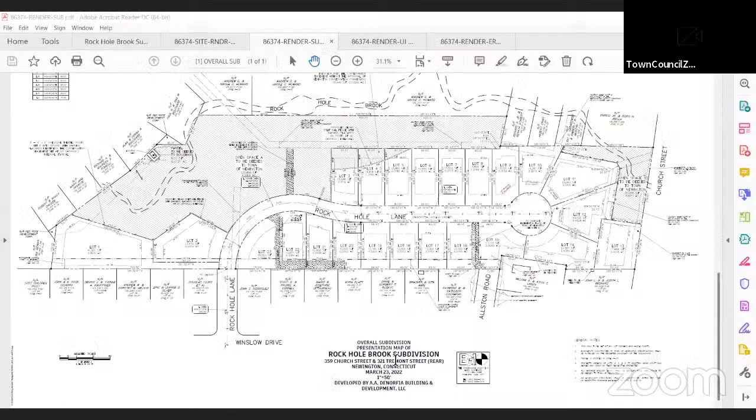I'm going to share the screen, Eric, if that's okay. There you go. Okay, so this application is for a special permit to allow a rear lot or interior lot per section 3.4.9 of our regulations. The proposal is to construct an interior lot on the west side of the proposed Rock Hole Brook subdivision.

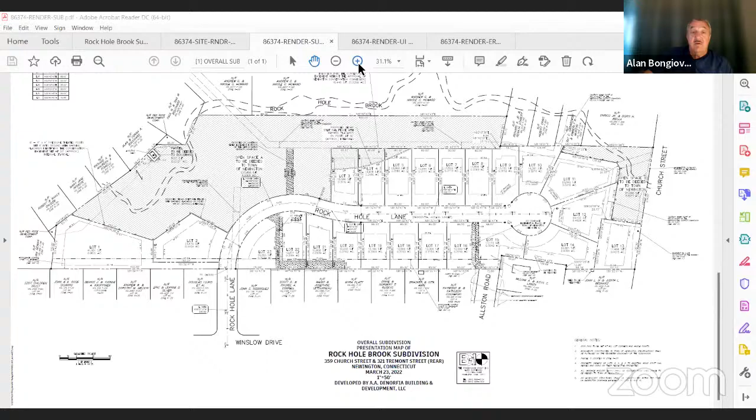I'm going to zoom in on the area. This would be known as lot number 1. In the R12 zone, or the R12 open space, the requirements for an interior lot are that it have at least a 20-foot wide access way owned in fee by the lot, which this does, and that the lot must have a minimum of 1.5 times the minimum required area for the zone.

R12 would be a 12,000 square foot lot. We're required to have a minimum of 18,000. The entire lot with the access way as proposed is almost 42,000 square feet, just under an acre. If you take off the 20-foot access way, we're still over 37,000 square feet. So we well exceed the minimum requirements.

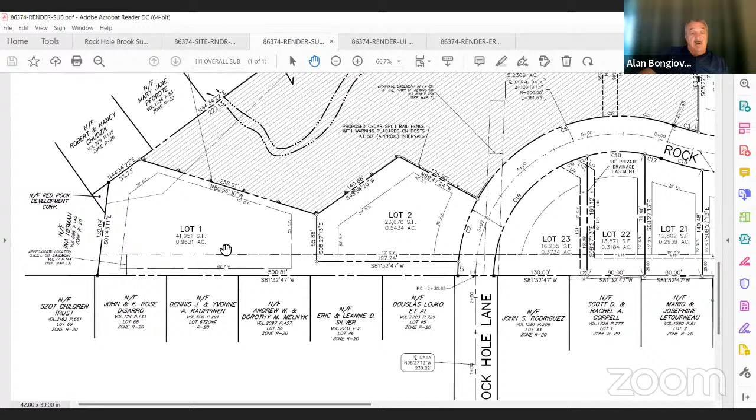Our access way and frontage is on Rock Hole Lane at this location on the west side of Rockhole Lane, and then going about 197 feet to the heart, or the interior, of the lot. At our previous hearing, we did hear from the neighbor, Mr. Melnyk, about screening. He has young children and had a desire to put some fencing in there. We've shown in red here, and it starts at about Rockhole Lane and goes along the rear of lots 102, 108, and 118 Winslow Drive, a proposed fence.

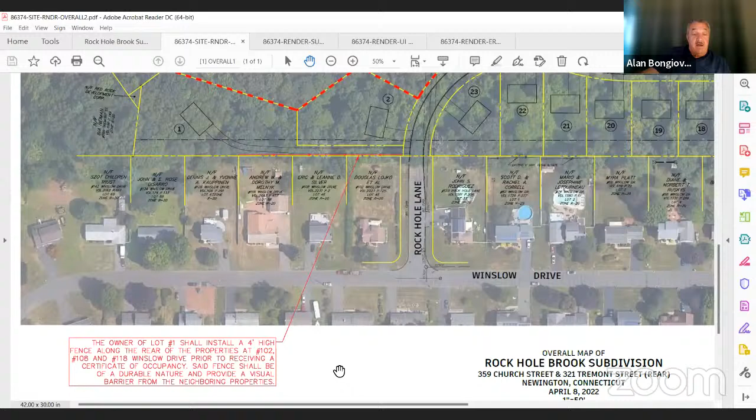I have talked with Mr. Melnyk a couple times since our last meeting. At the last conversation, he requested something in visual screening along the lines of the fence. So we're proposing, and we would be willing to have the commission make this a condition if they choose, that the owner of lot 1, the interior lot, shall install a 4-foot high fence along the rear of the properties at 102, 108, and 118 Winslow Drive prior to receiving a certificate of occupancy. Said fence shall be of a durable nature and provide a visual barrier from the neighboring properties.

As I had conversations with Mr. Melnyk, we didn't really decide on what was a suitable fence or what they would like, but part of the equation is who's going to live on lot number 1 and what they would like. I think this note covers the fact that a fence is required. The lot owner will be required to install that prior to a CO, and I think the language we're proposing will cover that.

There's a myriad of types of fences. There's wood, there's vinyl, there's metal. It could be a combination of a decorative fence with maybe some arborvitaes. So I didn't exactly define what it has to be, but the fact that it has to be a 4-foot high visual barrier fence along that rear, and I believe that should suffice.

This is only along this area because the driveway is close to the property lines. The driveway actually will be at or below the grade of the neighboring properties on Winslow Drive, and it's going to provide some protection for the young children if they were to chase a ball out of their rear yard towards this driveway, so they wouldn't have a conflict with the motor vehicle. And as Mr. Melnyk had requested, some visual screening might be a nice feature. So that's what we have proposed.

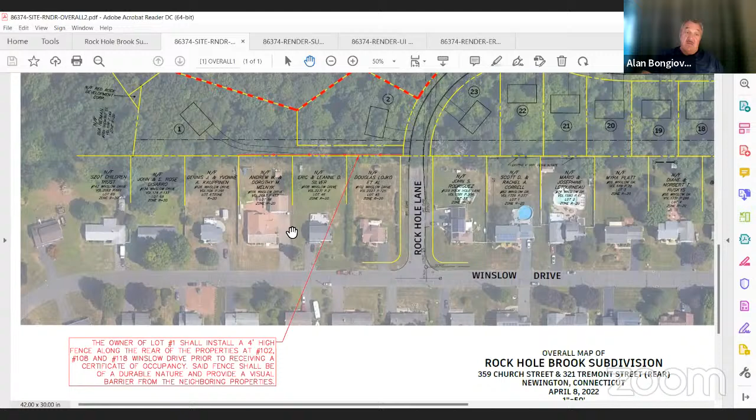The lot is significant in size. It's much bigger, as I said, than the zoning requires. It's a nice wooded area. The entire lot doesn't need to be cleared, but there's enough area to create a nice home site with usable yards and still leave some of the existing trees and buffer area that is on the property.

One of the neighbors had submitted an email to the planner, which was forwarded to me, and that was Mrs. Neiman in this location here to the west of the subdivision. Her house fronts on Tremont Street, and you can see the distance between her house and where a proposed house would go. It's several hundred feet, probably closer to 300 feet.

And between this lot and her property, the Rock Hole Brook traverses through the property, and a good portion of her land is actually on the other side of the brook. On our side of the brook, it's in a natural state, and I believe without permission from the Conservation Commission, it will stay that way in perpetuity.

This lot will be served by MDC sewer and water. All the utility services will be available for the lot. Some of the items to be considered by the commission are that it has a minimum of a 20-foot access way, which this does.

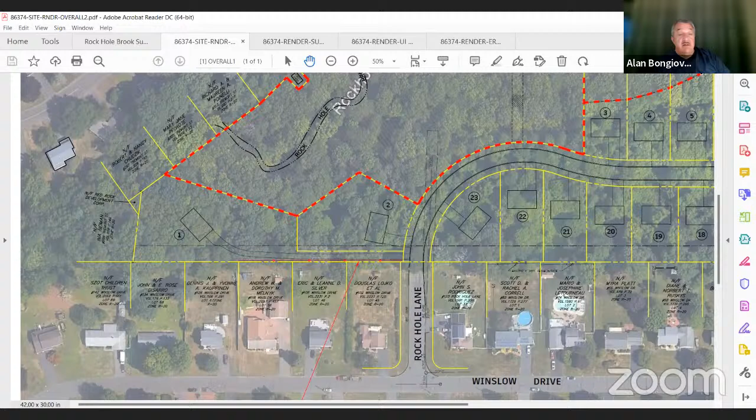And lastly, Ms. Neiman's letter talks about buffering and screening. I still have, I believe, control of the screen. You see the aerial photograph. The lines in yellow are the property lines. To the left of the screen, the most far left is Miss Neiman's house.

From the back of her house to her rear property line is probably in excess of 150 feet. The brook bisects her property. She and her husband acquired additional land so they would have additional buffering in that area, and that was per her statement in the letter. This is all wooded. It is all wetland or regulated area that, if anybody was to do anything, would require permission. We have, and we are proposing, to leave some of the trees on our property.

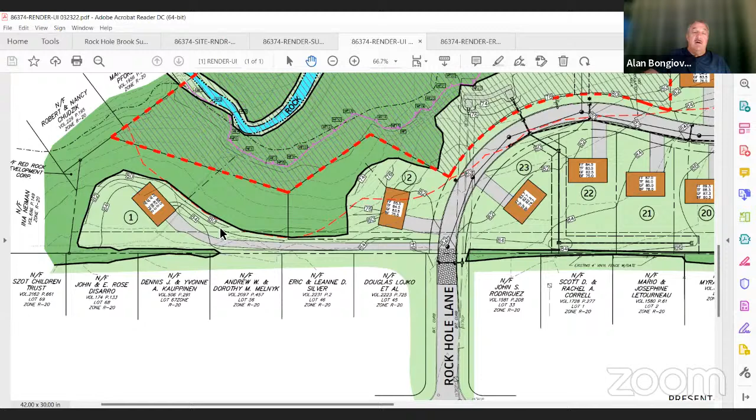There is no requirement for buffering between residential use and residential use. So between any neighbor on Rockhole Lane, or Winslow Drive, or Tremont Street, there's no requirement that one neighbor has to provide screening from another neighbor with the same use. I just submit to the commission that there's adequate screening that exists today and will exist in the future. Any additional screening or buffering is not required and is not part of our regulations.

With that, if you have any more questions, Mr. Chairman, I'd be happy to answer them. Okay, thank you.

Staff, I mean, the public has a position to rebut. Ray, come up here and state your name for the record. And right ahead, this is concerning the rear lot.

All right, there's two questions. Why aren't we getting a road to Church Street? Why do we have to do it this way? And the second one is, where are the rights of the people who aren't here? They've been disconnected. We don't have to say anything. We have you people that we elected. God bless us, we're in trouble, just like America.

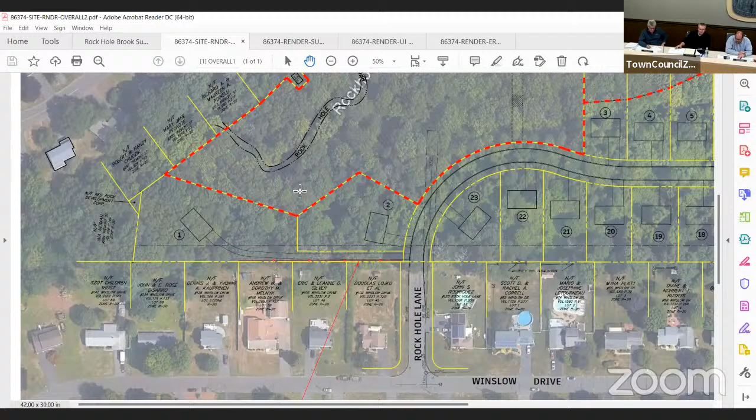Petition 15-22. If Vice Chairman Claffey could read that, please. Petition 15-22, special permit section 3.19.1 and 3.15.6, and associated site plan to allow a place of physical activity, swim school, in the PD zone at 77 and 93 Pane Road. Applicant SBS Realty LLC, owner McBride Properties Inc. Contact Merton J. B. Sabenrad.

I'm going to turn the meeting over to the Vice Chairman. I'm an abutter, and so I'm going to recuse myself from this petition. Thank you. Thank you.

If the applicant is present, I'd like them to come forward and present their petition here before us.

You have to bear with me, this is the first presenting on Zoom in a public space, so I'm going to do my best here. I think, little technical difficulties. Yeah, so I'm live on Zoom on my computer, and screen live share is all good, so you should just be able to... yeah. I think it's going to work.

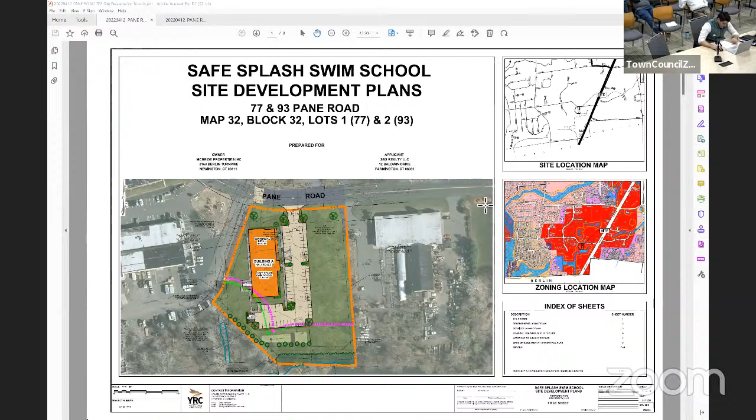All right, so it worked. So the first sheet you have here is your title sheet, sheet 1 in the site plan set. Just real quick to orient everybody on where we are - we're at 77 and 93 Pane Road, which is at the south end of town, at the bottom of the Berlin Turnpike. On this title sheet, Payne Road is up, which would be north. To your right would be S.A. Frink Garden Center, to your left would be Connecticut Auto Repair, to the west. The Stew Leonard's property would be just below off the screen here, to our south. And if you went eastbound on Payne Road, you'd come to the intersection with Berlin Turnpike about 900 to 1,000 feet down the road. What I'm going to do is just jump to the survey that was submitted as part of our site plan application.

It is zoned PD, or Planned Development District, and the current use is vacant. So there's nothing on it now except for an extensive regrowth of invasive species, mainly due to a historical land use back from the earlier mid 1990s when this area was improved.

The S.A. Frank property here was a warehouse by itself. Their property, these two properties, as well as the property to the east, which is storage, and further east, which is the car wash, were all part of a development that improved this area. Speaking directly to our property, the entire area from about the midpoint south was filled to level it off for future development. Nothing's happened since then, but we're here today to come forward with the planned type of development they had at that time.

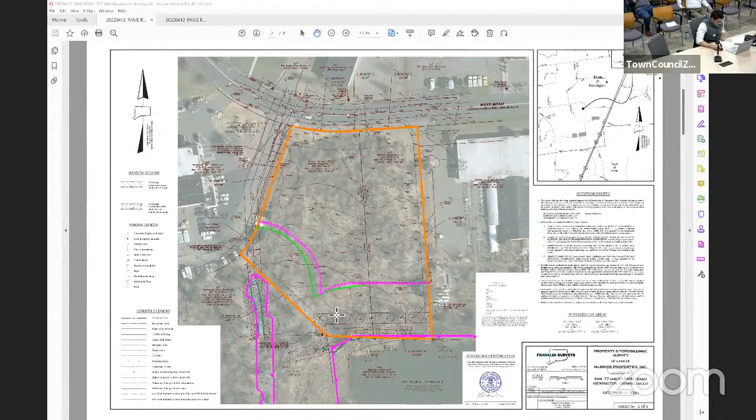Moving forward, this is sheet 2, again with color in the aerial overlaid for clarity. I won't spend too much time on this except for talking about the general access to Payne Road. In the center of the two sites, or the dividing line, which would be combined as part of this property, we have our main access drive to Payne Road on the south side.

That serves a single drive access 24 feet wide through the site and around our building. In orange, you see one building of approximately 11,200 square feet located on the west side of the site. There's no current development proposed on the east side of the site. However, there may be something in the future. There are no plans, but we did leave a spot there for future development.

I am going to speak quickly about access, traffic, and sightlines. We do have adequate sightlines from this proposed driveway location looking in both directions. It's on the outside of this curve, so we have good sightlines looking both west and east towards Berlin Turnpike. A traffic report was performed by VHB. They found that the traffic generated by our site won't significantly impact the traffic on Payne Road or the adjacent intersections. We can go into detail further if there's any questions, but we did study Payne Road and the subject intersections, and there's no significant impact.

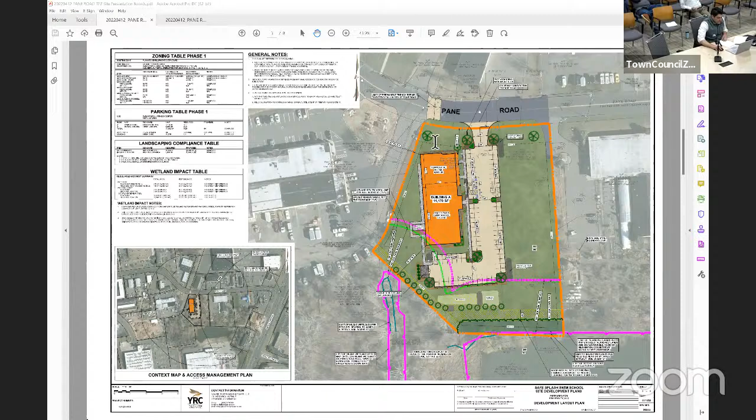This is sheet number 3 from your plan set, a more detailed view of the site layout showing a higher scale resolution of the proposed development layout. As you come onto the site, we have a 28-foot wide access drive that feeds into a 24-foot wide driveway through the development, running north to south and then hooking around the back of the building. We have 64 parking spaces proposed, which exceeds the minimum 56 required for the development. The building itself, on the west side of the site, is 11,170 square feet.

The swim school, which is why we're here tonight, will be located in about 7,000 square feet of the southerly side of the building. The northerly side will be commercial space that's not currently designated, facing Payne Road. Access to the commercial space will be on the east side of the building. Access to the Safe Splash Swim School will also be on the east side, more centrally located in a vestibule. Sidewalks are provided along the entire parking area, connecting all parking spaces as well as the satellite parking area to the south.

On the rear of the site, we have a pedestrian sidewalk that connects all the rear doors, or back of the house doors, with the trash enclosure area, located to the southwest, and to the loading area, located adjacent to the trash enclosure. So I covered parking, covered the trash enclosure. Any questions on the layout before I jump to the next?

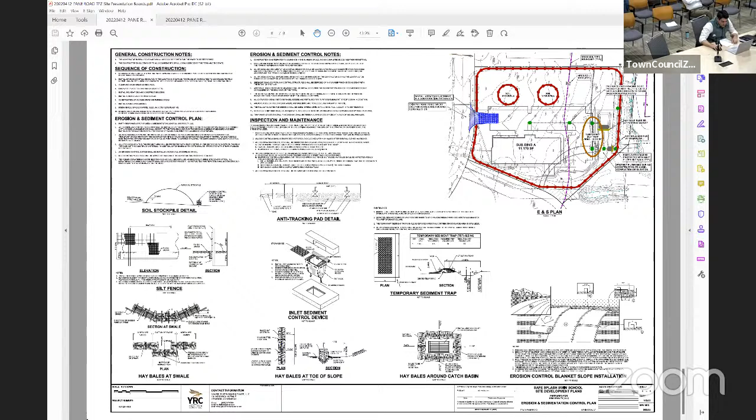What I'll do is see if I can open up the architecturals, and John Wicko is on the line, I'll see if he can jump in and run through the building. I am not Brandon Hanfield, I'm John Wicko. The office is at 58 Prospect Street in Milford.

I have just a short presentation to familiarize the commission with the building, starting off with the renderings. In general, the building is a single story, noted as Building A, the only building on the site, 11,170 square feet with the 3 tenants, as Brandon discussed previously. The overall height of the building is 24 feet to the top of the parapet.

That encompasses the whole top of the building, and it sits over a vertical architectural metal, rendered in interstate blue from the company we use. In areas, it's also over the storefront, which is a black charcoal frame with a glass insert. The other entry canopy wraps around towards the front and changes material from the Safe Splash. It's an architectural metal panel rendered in a silver color, so it complements the other colors we chose for the building. There's also the storefront and large windows for street presence.

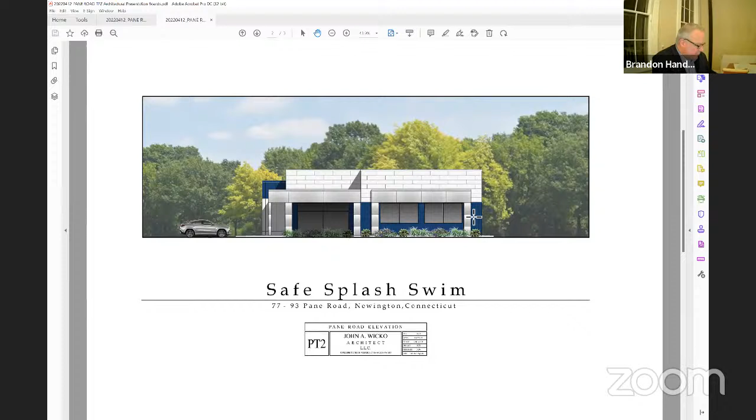The floor plan, which is on A1, is an overall description of the two tenants at the front, tenant 103, 102, and then the Safe Splash Swim has been designed to show the use, the nature of the function, and how it flows. The next sheet, A2, shows a larger scale plan, which is easier to read.

You walk in from the entrance into the vestibule, and it opens up to the reception and viewing area that has all windows that separate the pool for environmental comfort reasons, and also for visual while the kids are in class taking lessons. We also have a meeting room that doubles as a party room over to the right, just off the entrance itself. You go to the back of the building into the changing rooms with toilets over to the right, and there's also some changing room to the left, which is handicapped and for staff.

That all opens up to the pool area, which has one large pool, 60 by 20, towards the rear, with glass towards the back for light and atmosphere. And we have what are called SwimLabs pools, which are kind of big hot tubs sitting on the slab, used for training for more advanced students. In the back corner is the pool equipment and chemical and electrical stuff like that, tucked into that back area.

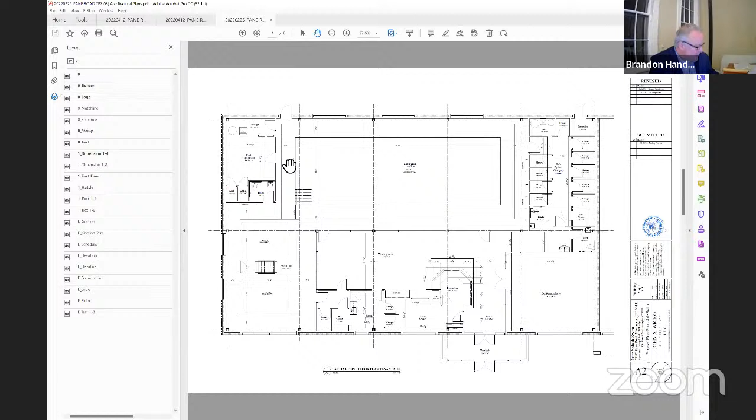We also drew a building section so you can see what happens on the interior. It's an industrial looking building with some open web bar joists that are open to the larger viewing area and swim areas, with a slope roof that pitches the water, sheets off to a gutter that goes into that drainage system that Brandon described. We also have towards the front of the building a few of the support facilities, the office and things that have a lower finished ceiling for the convenience and privacy of those uses.

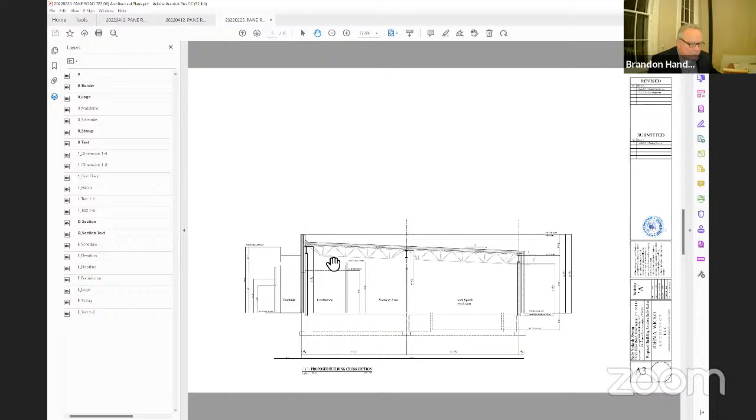The front elevation just describes what those renderings are. The next sheet, A4, is an overall showing you the building at scale and then a larger scale, so you can kind of see some of the details of the siding and the panels and the vestibules and canopies. Same with the rear, it describes those.

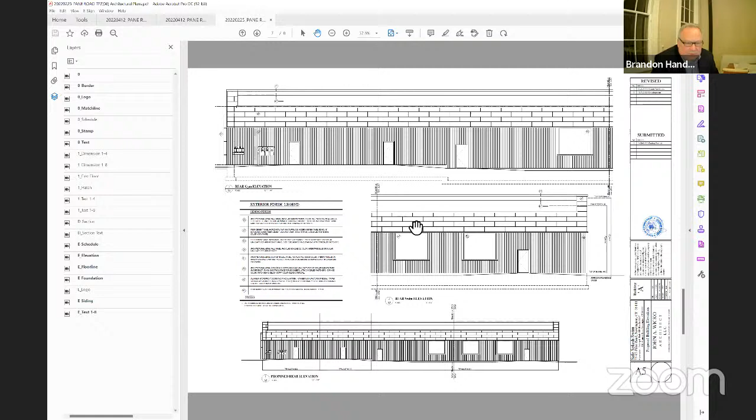It also has the exterior wall finishes called out clearly on all those sheets. And then the rear shows the rear and how it looks and what its function is for getting rid of the water. That's my brief presentation, and I can certainly answer any questions that you guys might have.

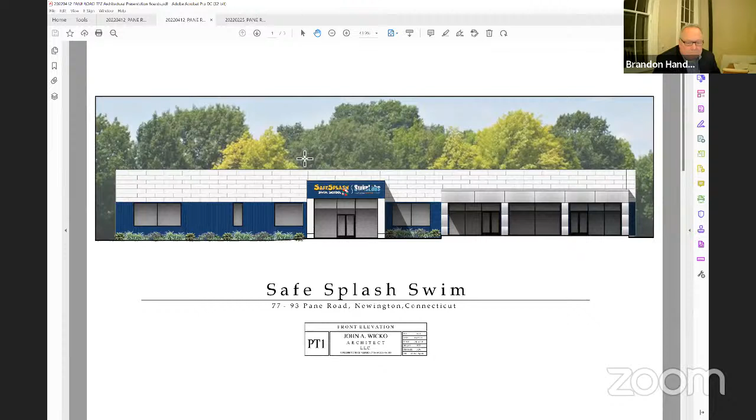You all set? Do you have anything else? For now, I think that's pretty good for our initial presentation. I would like an opportunity to come back and kind of close out.

Most definitely. Yeah, I want to certainly open up to questions from the commission, open it up to Renata or Eric for their report, and then I'll open it up for commissioner questions directed at you or your staff.

So with regards to staff comments, this went through the Conservation Commission. At that point, it had some minor and technical comments by the staff, which I understand were all resolved at this point. So at this point in time, all of the comments by the staff have been addressed to our satisfaction. And as far as the commission is concerned, all that you are looking at are...

Sir, you can stay up here. I didn't know if the public wanted to speak. No, I'm gonna get there, but you can, if you want to move to one side or the other, you don't have to keep moving your equipment. I'm sorry. Appreciate that. Thank you.

All of you will be, as a commission, reviewing our criteria for special permit. And then, since this was presented as a combined application, site plan criteria as well.

Okay, and there were no, you found everything that was sent back is manageable to be taken care of? All the comments have been addressed today. Have all been addressed? Yes. Okay, thank you, there are no comments.

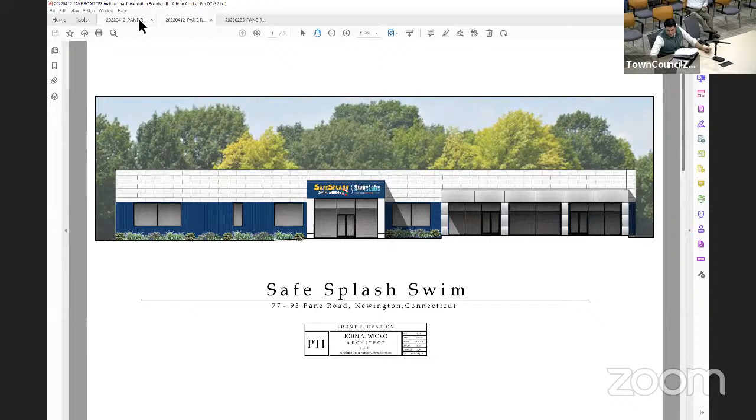So we do show a monument sign location just off the driveway. I see it. We don't provide the details at this time, so the sign company will likely be coming back to obtain those permits once there's a design for the sign and the size. Right in front of the shade tree that's there? Yes. Yeah, okay, I see it now. There you go. Yeah, I see it.

More for staff. Is there concern about whether they have sufficient parking? What happens when the other lot gets developed? Or do we worry about that at that time?

Building I is, I think it will depend on the proposed uses. As it is right now, we're aware there's a plan for additional development on this property, but what ends up happening with regards to parking will depend on the proposed uses. So as long as they can develop this and the proposed use meets the minimum parking required, they should be okay to do that subject to special permit or site plan approval.

One last question - I'm assuming the parking here and the minimum requirement, I believe was 54 or 56, one of the two, that's for the entire building, not just the swim school, correct? That's correct, the entire building.

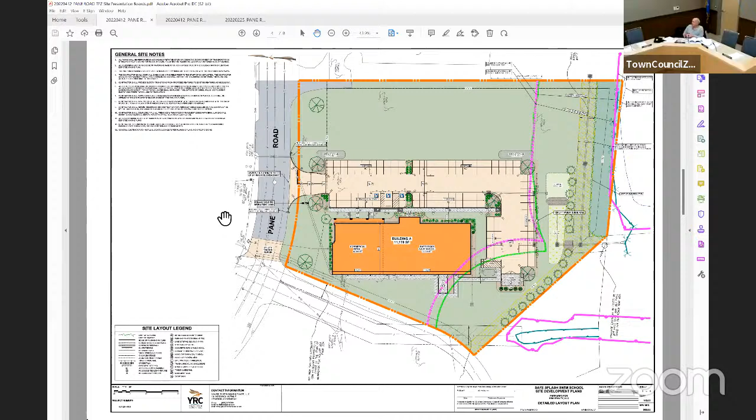Thank you. Commissioner Gill? As far as the parking, is the level of parking they're proposing going to fit any piece of tenant there? What they based their calculation on was place of physical activity and a retail space, and that's what we developed the parking numbers for.

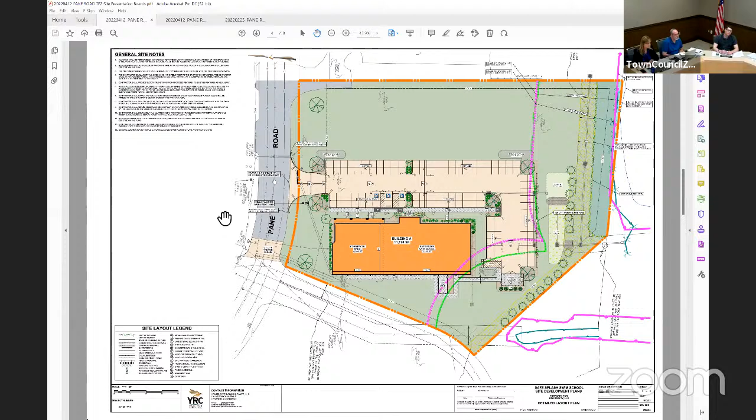All right, then the retention pond - is that being lessened or made smaller, or is it just going to stay? So the retention pond's actually off our site, on the adjacent abutter to the south. The retention pond will not change at all. And that has sufficient storage for our peak flow attenuation. All we're going to do is treat it to make sure it's clean before we discharge to it, and we have easements to do that. Okay, thank you.

Any other questions? You're good? All right, without any other - I had a question, but Commissioner Gill had asked it and you had answered it about the retention pond.

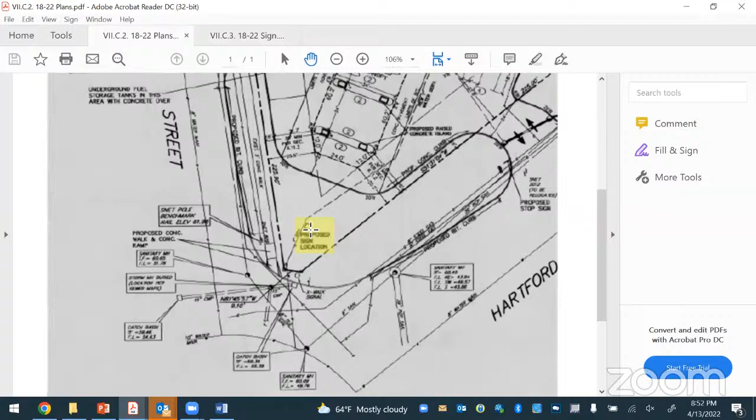Okay, very good. I'm gonna go to questions for commissioners. I just had one question to clarify - is this a two-sided sign or a one-sided sign? Is it going east to west or north to south? It will be two-sided, but the second side will be towards the building. So it's going to be kind of at an angle - it's not going to be facing Hartford Ave or facing Main Street. It's going to be kitty corner, as they call it. Okay, so one side? Yes. I understand, thank you.

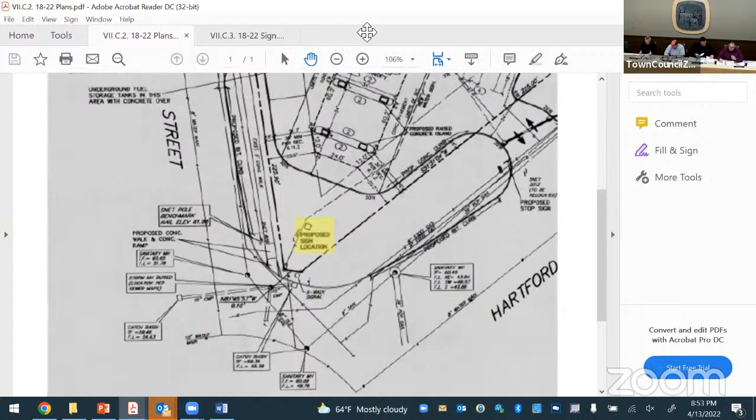Okay, any other commissioners have any questions? No other questions from the public? I'll entertain a motion from the commissioners. Make a motion that we close petition 18-22 special permit and move it to old business to act on tonight. Second. Motion made by Commissioner Claffey, seconded by Commissioner Havens. Any discussion? Hearing no discussion, all those in favor? Aye. Opposed? Motion carries unanimously.

Thank you. Okay, next thing on our agenda is the approval of minutes. We have TPZ minutes of 03/23/2022 regular meeting. I'll entertain a motion for those. Move that we accept the minutes as written for the 3/23/2022 regular meeting. We have a motion by Commissioner Woods. Do I have a second? Second, seconded by Commissioner Trista. Any discussion, any corrections for the minutes? Hearing none, all those in favor? Aye. Opposed? Motion carries unanimously to approve the minutes.

We're under new business now. The next thing on the agenda is TPZ bylaws, and I will ask the staff to give us a little report. I asked Renata to look into this, and I also asked her to look into having some term in there for when the meetings run a little long, so that we don't run into the same problem we had recently. Tonight she's gonna give us a brief overview of this, and then we won't take action until the next meeting. This is the document, so at this time I'll turn it over to you, Renata.